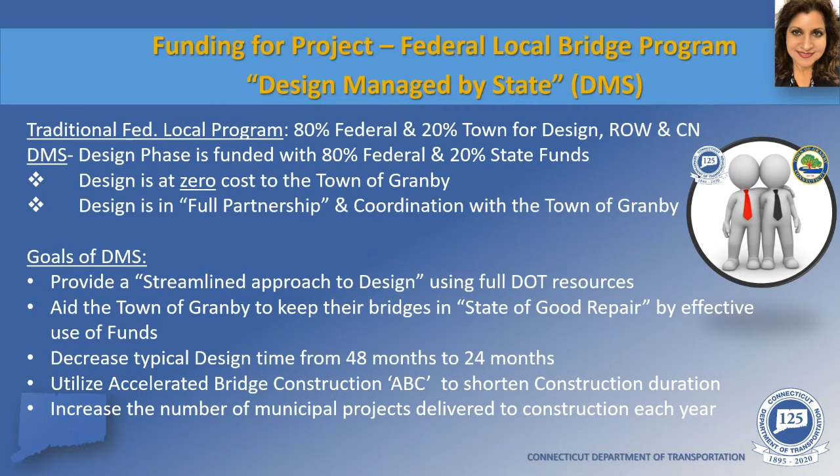Thank you, Preeti. For those of you that do not know me, my name is Kirk Severance, and I am the Public Works Director for the town of Granby. The Connecticut DOT performs safety inspections for all bridges over 20 feet in length at 2-year intervals. The Donahue Road Bridge was flagged as one of those bridges in town needing repairs.

We knew that the bridge needed to be rehabilitated and were looking for the most efficient way to proceed and stay within the guidelines of the allocated bond money. Traditionally, the town would have selected and hired a consultant to develop the design, and they would have been responsible for navigating through the design process, with the town covering 20% of design costs. As Preeti mentioned, when the Department of Transportation offered the DMS program to the town, we felt it was a win-win solution for the town, since the state's pre-selected consultants would have better knowledge of the design process, resulting in both an early completion of design and construction, and not to mention the cost savings.

We started meeting with the state in July of 2019 to get an understanding of how the program worked and how it may benefit the town. After several more meetings with the state, the town recognized that this program would be a good joint effort and agreed to go forward with it.

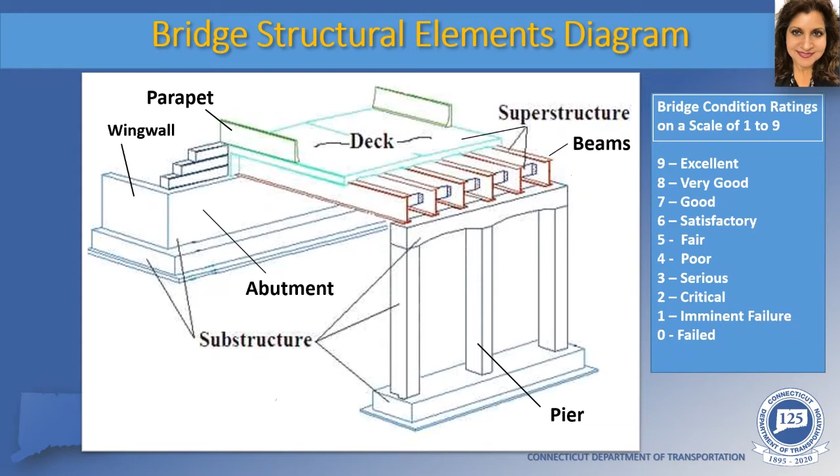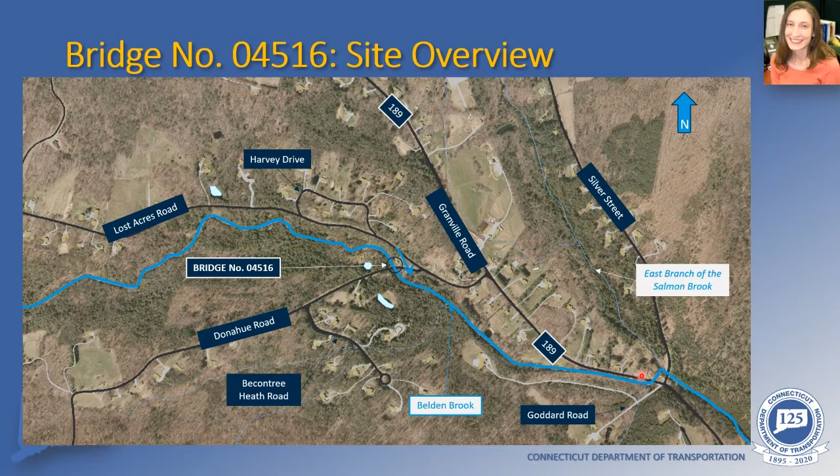The existing bridge was built in 1956 and has a span length of 41 feet 10 inches. The roadway curb-to-curb width is 22 feet 10 inches, and the bridge carries one eastbound travel lane and one westbound travel lane. Per FHWA criteria, the deck geometry is rated a 4, meaning the geometry meets the minimum tolerable limits without needing any corrective action. For the current average daily traffic, or ADT, on Donahue Road of 393 vehicles per day, FHWA requires a curb-to-curb width of 20 feet, which is less than the existing roadway width of 22 feet 10 inches. Even if the daily traffic increases up to 1,000 vehicles per day, the required curb-to-curb width is 22 feet, which is still less than the existing roadway width.

Per Connecticut DOT criteria, at a minimum, the bridge curb-to-curb width needs to match or be greater than the approach roadway width. In this case, the approach roadway width on both sides is 20 feet, so the existing bridge curb-to-curb width, being greater than 20 feet, also meets Connecticut DOT criteria.

A couple of other things to note on this slide. There are overhead wires that run along the north side of Donahue Road to the west of the bridge and cross the roadway and bridge diagonally, connecting to a utility pole at the southeast corner of the bridge. Also, there are a driveway and private septic tank for a residential property located very close at the northeast corner of the bridge.

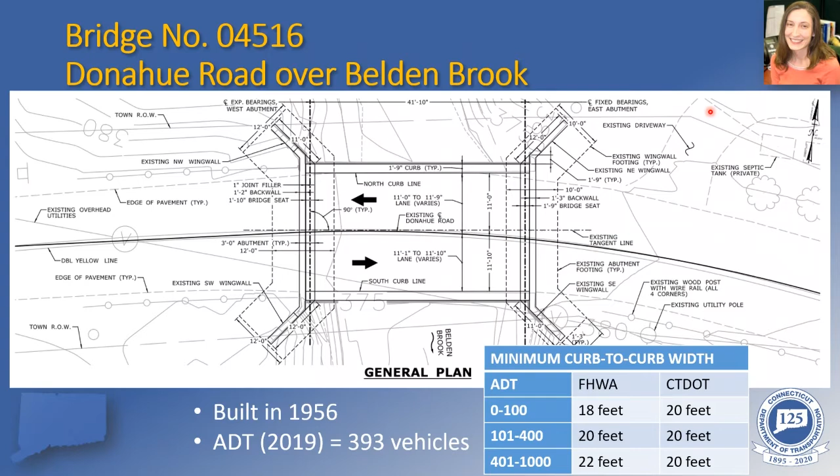The existing superstructure consists of 7 pre-stressed concrete deck units and 2 pre-stressed concrete curb units that are a minimum of 25 inches deep and topped with a bituminous concrete wearing surface. Along both fascias are curb-mounted bridge rail systems that consist of 2 wire cables attached to steel posts. Due to a horizontal curve over the bridge and the bridge being on a tangent, the lane widths vary from a minimum of 11 feet to 11 foot 10 inches.

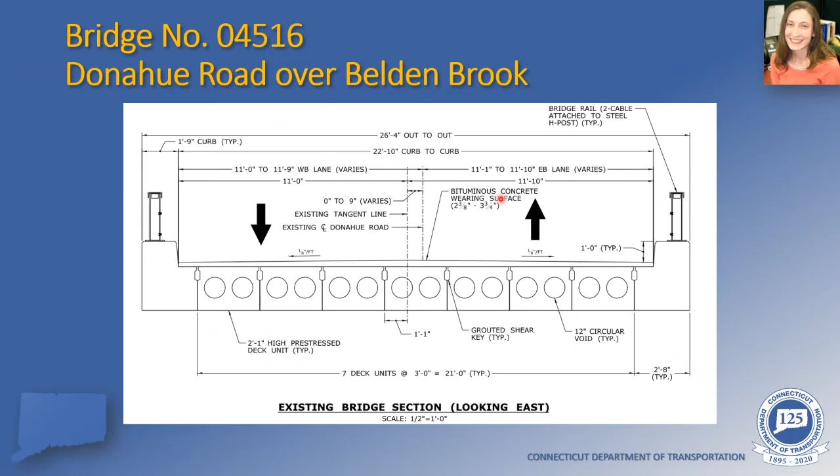The superstructure, shown here, is supported on reinforced concrete abutments that are on spread footings founded on rock. The low chord elevation, located at the east abutment of 378.9 feet, is higher than the 100-year storm elevation and the 500-year storm elevation, meaning that the bridge can pass both the 100-year and 500-year storms. The bridge slopes down from west to east. The approach guide rail consists of 2 wire cables attached to wood posts.

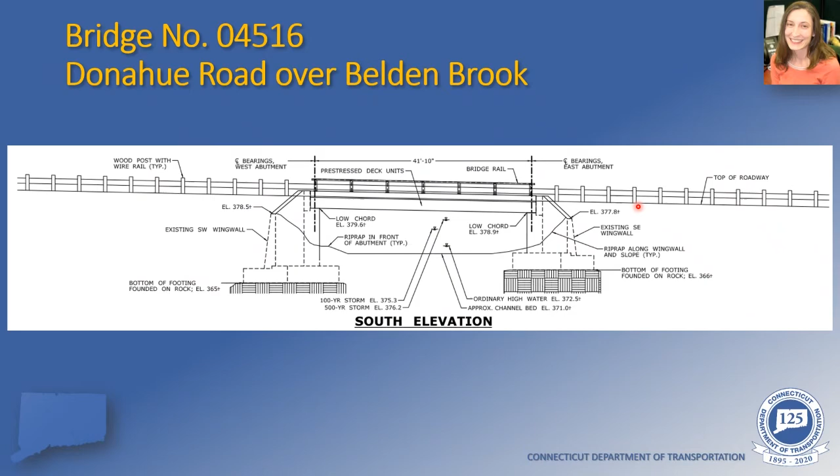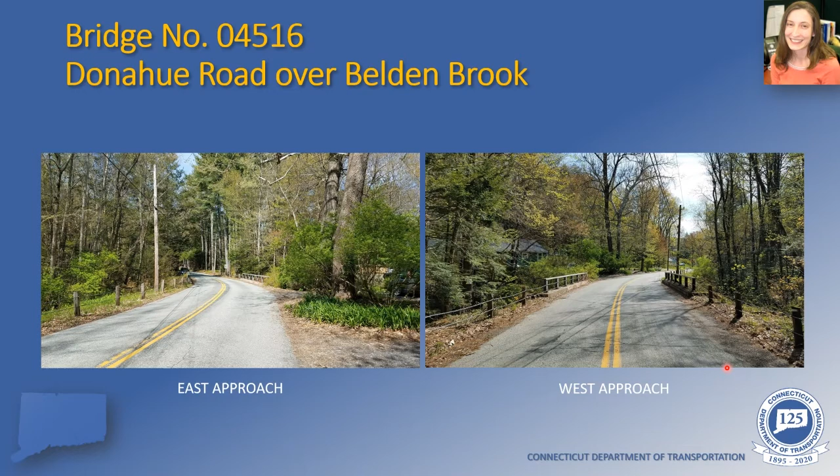In the photo on the left, you can see the horseshoe driveway to the property at the northeast corner of the bridge. As mentioned earlier, bridges are inspected every 2 years and rated on a scale of 1 to 9.

Based on the latest biennial inspection performed in 2019, the deck overall is rated a 5, meaning it is in fair condition. The overlay is considered to be in good condition, with minimal deficiencies noted.

For this structure type, the deck condition is based mostly on the visible portion of the underside of the bridge, and considering there is efflorescence and water staining evident between deck units, the deck is considered to be in fair condition.

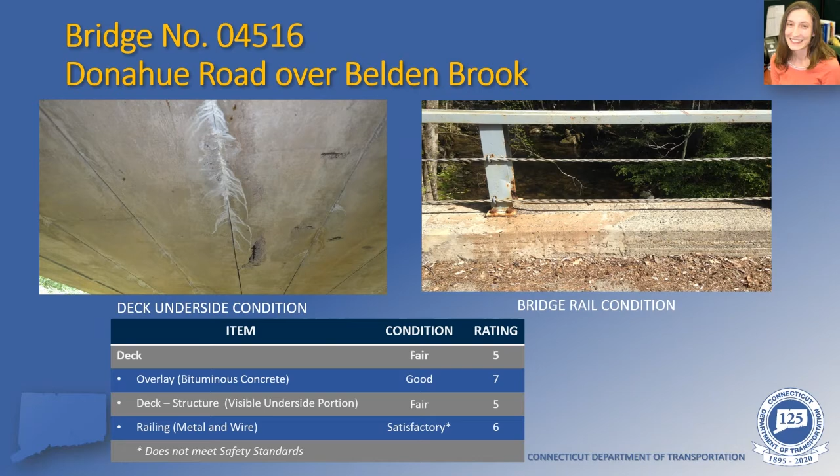The superstructure rating is based primarily on the condition of the girders, or in this case, the pre-stressed concrete deck units, and also the condition of the bearings, which for this bridge consist of pre-molded elastomeric material.

The deck units are considered to be in poor condition due to large spalls in the concrete with exposed, rusted, and broken pre-stressing strands and transverse reinforcement, called stirrups, being found on a few deck units.

The photo on the left shows the worst deterioration, consisting of a few broken pre-stressing strands, which are the ones in the longitudinal direction, and 2 broken stirrups. This was found on beam number 5.

Efflorescence, which is the white stuff here, and water staining between deck units are also typical conditions. There is also a 1-inch vertical misalignment between beams 1 and 2.

The bearings are not shown here. I will point them out on the next slide, but they are considered to be in fair condition due to the pre-molded material squeezing out onto the abutment stems.

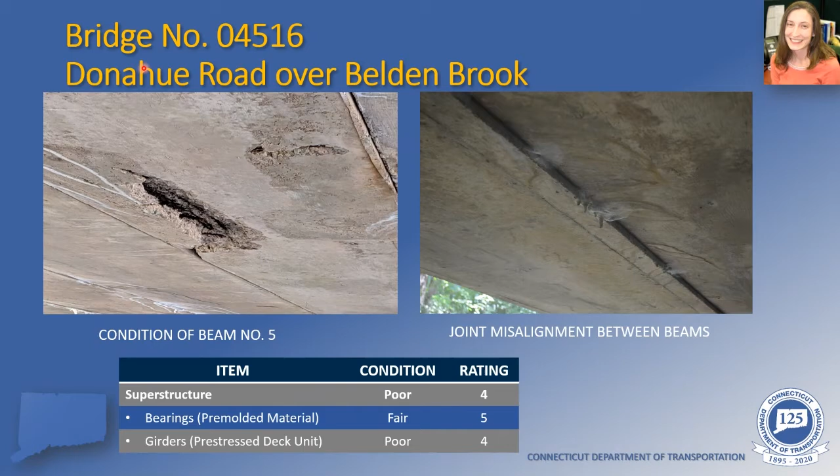These two photos show the substructure units, or the west and east abutments.

Going back to the bearing condition, the bearings were considered to be rated a 5 because, as you can see, they're starting to squeeze out underneath the deck units onto the abutment stem base.

The abutments are in satisfactory condition. There is some minor deterioration noted. There are areas where the concrete has spalled and there are exposed, rusted reinforcing bars.

The footings are generally covered and there's riprap placed along the abutments. However, at the south corner of the east abutment, the footing is exposed slightly.

Based on what's exposed and visible, the condition is considered to be satisfactory. Because this bridge is founded on rock, erosion and scour is not rated. It's not a concern at this location.

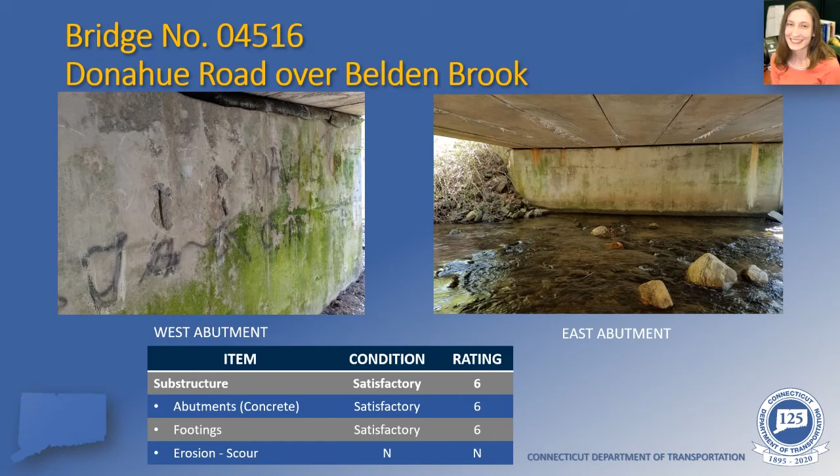These two photos show the channel. On the left, we have the upstream channel from the bridge, and on the right, the downstream channel from the bridge. You can see there's a lot of rock lining the embankments on both sides.

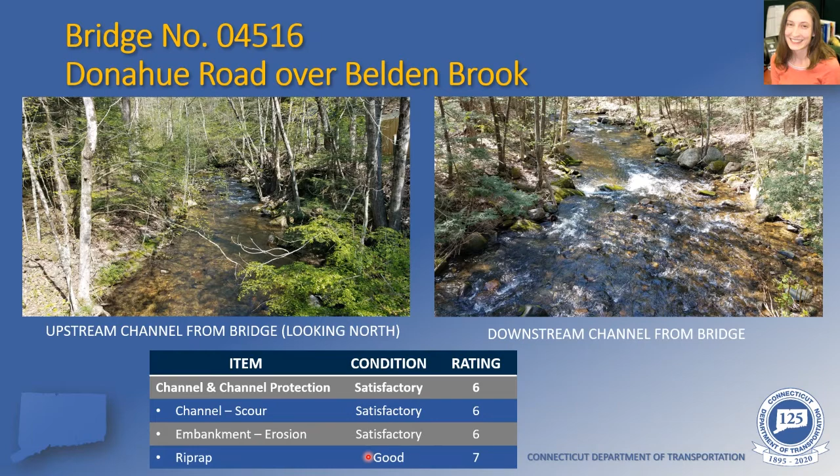The channel scour is considered to be satisfactory. Embankment erosion is satisfactory, generally just noted at the northeast corner of the bridge. The riprap placed in front of the abutments is considered to be in good condition.

Considering all of the existing bridge deficiencies and characteristics, the bridge elements that need to be fixed are the superstructure, which is in poor condition due to exposed, rusted, and broken pre-stressing strands in a few deck units.

Also, the bridge and approach rail systems, which do not meet current safety standards. The substructure is in satisfactory condition and can be reused. However, there are some spalls and other concrete deterioration that could use repairs to extend the service life of the abutments.

On the other hand, the existing bridge is hydraulically adequate and has adequate deck geometry. In addition, the abutments are founded on rock and there are no scour concerns at this location. So no major modifications to the bridge span, width, or profile are required.

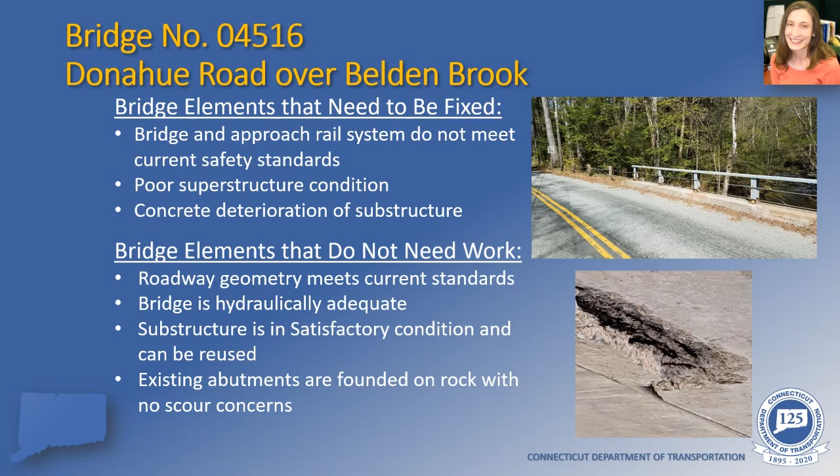The proposed improvements under this project include the replacement of the superstructure with a new superstructure consisting of pre-stressed concrete deck units, similar to what's shown in the photo here and what's on the existing bridge. The new superstructure will maintain the existing 22-foot, 10-inch roadway width. New open bridge rail and approach rail systems that meet current safety standards will be installed.

Concrete repairs will be performed on the substructures along with the application of a protective sealant to improve the substructure condition and increase the service life. Full depth roadway reconstruction in both approaches is also proposed.

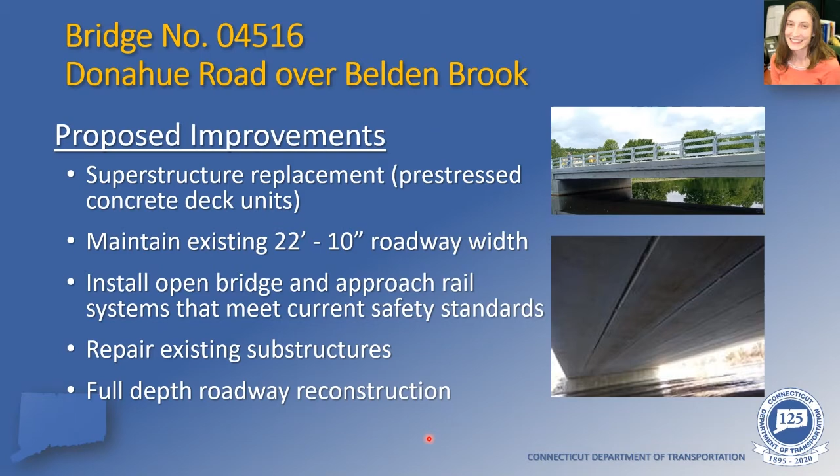On this slide, we're comparing the existing bridge section with the proposed bridge section. The existing bridge has an out-to-out width of 26 feet 4 inches, and the proposed bridge has the same out-to-out width. The curb-to-curb width of 22 feet 10 inches will also be maintained. Since we're matching the existing width, no major modifications to the substructure are needed—we don't need to widen any elements to accommodate the superstructure.

In the proposed design, there are 7 pre-stressed concrete deck units topped with a reinforced concrete deck that has a minimum thickness of 6 inches. The concrete deck will be topped with a waterproofing membrane and 3 inches of bituminous concrete. On both sides, we're proposing open bridge rail that's curb mounted and will meet current safety standards.

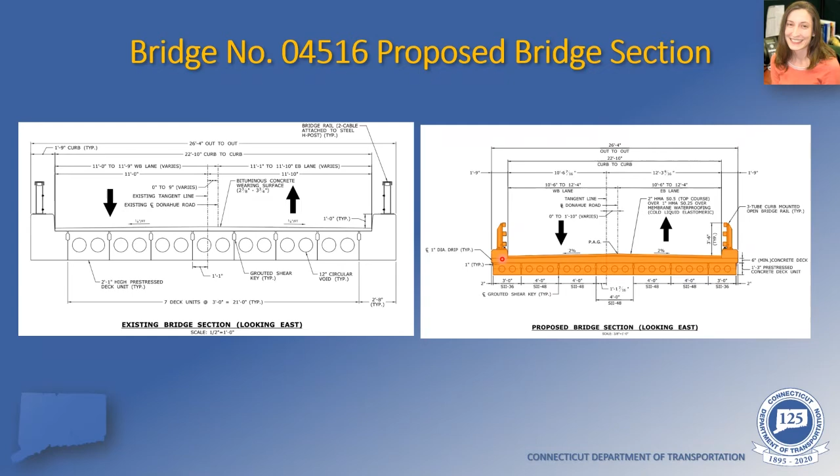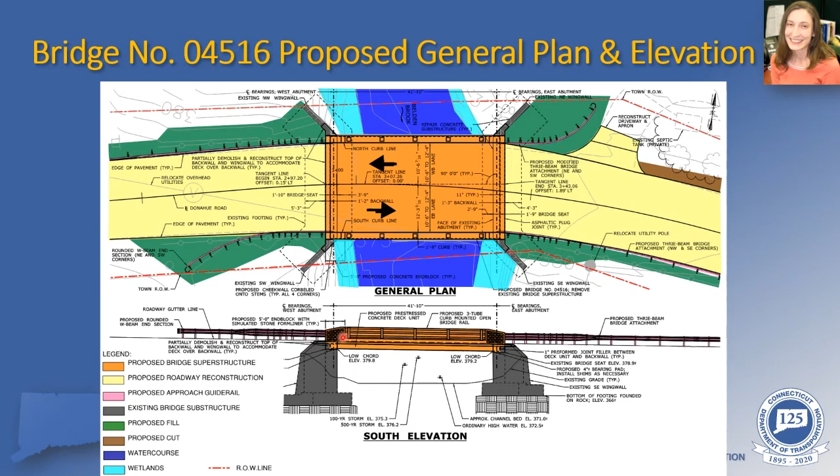I previously mentioned that there is a privately owned septic tank for this property at the northeast corner. It is located here. As you can see with the coloring, construction is proposed to avoid that location.

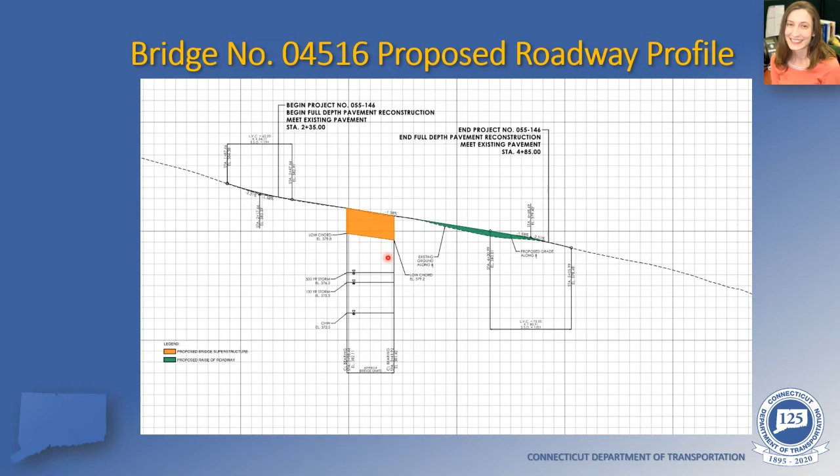There is a dip in the road just east of the bridge, and we're proposing a slight raising of the roadway there to create a smoother curve through this section. Again, the low chord is a little bit higher than the existing low chord, and this is still well above the 100-year storm and 500-year storm elevations, so the bridge is still hydraulically adequate.

During construction, the proposed maintenance and protection of traffic consists of a full closure of Donahue Road at the bridge. It's estimated that this would be for one construction season, or approximately 6 to 7 months. During this time, traffic would be detoured.

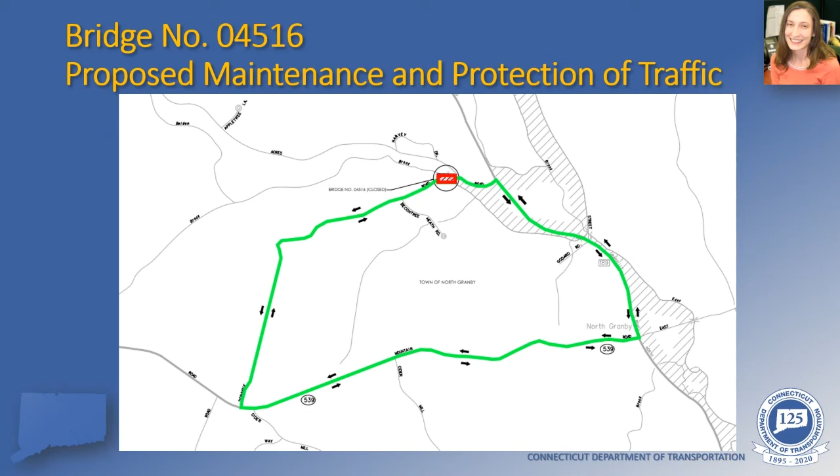As I mentioned before, the utility impacts consist of relocation of the overhead wires that cross over the bridge, and also most likely the utility pole at the southeast corner of the bridge. This will be needed in order to facilitate the demolition of the existing superstructure and placement of the new pre-stressed deck units.

As for environmental impacts, fish passage will be maintained much like it is currently in the existing bridge. Temporary wetland and watercourse impacts are anticipated. However, the good thing about the proposed rehabilitation scope is that most of the work can be performed from the roadway in the approaches to the bridge, so that will significantly minimize the impacts to the wetland and watercourse.

We do anticipate that a few permits will need to be prepared before construction, including the Town of Granby Inland Wetlands permit, the Connecticut DEEP and DOT Flood Management Certification Municipal permit, and also the Army Corps Self-Verification permit.

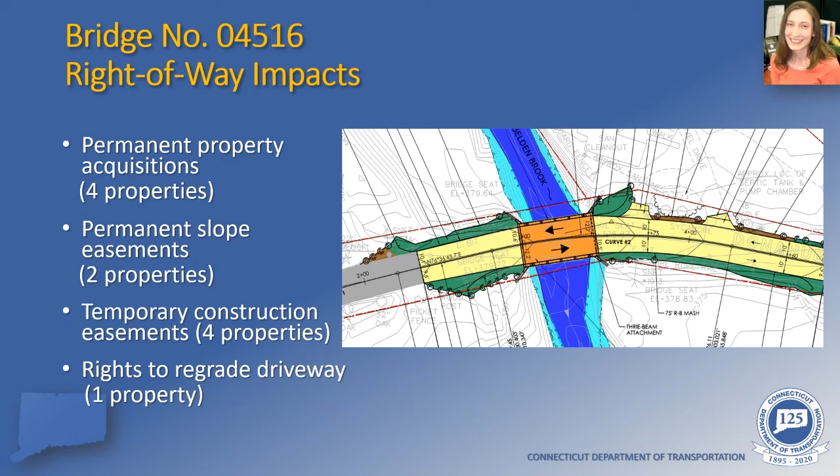As Tracy said, we weighed out all the options, and the route we wanted to go was to replace this as soon as possible. Also, the area is a dark area and would raise more safety concerns, so this was the best avenue to pursue, and that's why we're going forward with this.

Thank you, we have another question. What color will the bridge rail be?

It's up to the town. We'll be working with town representatives to figure out what color they would like. More than likely we'll be going with black railing and cobblestone, similar to the Silver Street Bridge, and the black railing you see over Beeman Road. So that's really the direction we're looking right now.

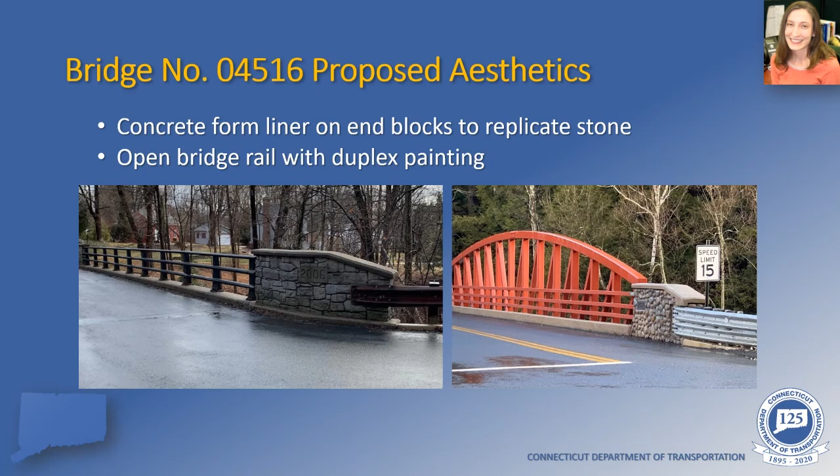Okay, thank you Kirk, next question. Will mail delivery be impacted? How will EMS be coordinated?

We'll talk to the Postal Service, and unfortunately they're going to have to go up the mountain and come down Donahue to service residents on Beacon Tree and Donahue. We're also coordinating our efforts with all EMS - fire department, police, and ambulance - and they're kept in the loop all along. As we get closer to the replacement day, we'll be having meetings and assuring residents that they'll be safe, everything will work out just fine.

Thank you, next question. How will the residents know when the actual detour will begin? Will the town reach out to the residents?

One of the venues we'll be using is our Granby webpage, so I urge anybody in the area to watch that for updates. We'll also be using signage in the area, there'll be times when we send out flyers to residents, and we'll be borrowing the police department's electronic signboard. So we'll do all we can to inform everyone and make this as smooth as possible.

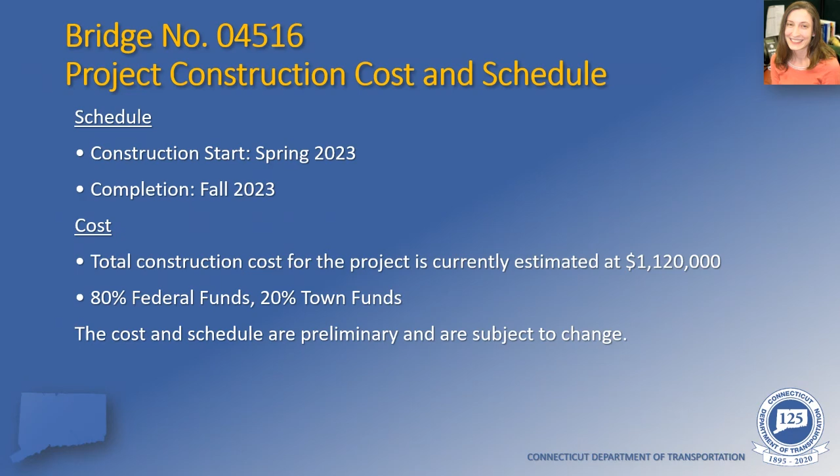We have another question. There's an assumption that access will be maintained for residences at the northeast corner of the bridge, being within the construction limits. In the project documents and specifications, we will note that the contractor has to maintain access for that property owner so that they can get in and out of their driveway.

And just to add to Tracy's response, there'll also be a full-time inspector monitoring the bridge construction. If there is any requirement for the contractor to temporarily block a roadway or driveway, they will seek permission from the owner before doing that. That coordination will happen during construction, and that will be the responsibility of the inspector on the job.

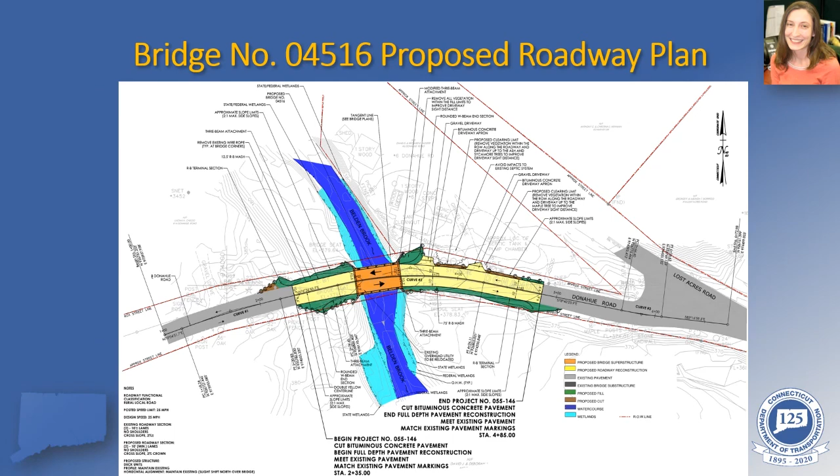Thank you, Anand. We have another question: Will Donahue be closed for the duration of the project, or only while the superstructure is being replaced? At this point, it's primarily for the demolition of the bridge and the superstructure work, as well as the approach roadway work.

So there are some other activities that can be done outside of the roadway closure, like installing the MBR, etc. When we get further into design, we can look at shortening that duration time frame, but conservatively, we're estimating 6 to 7 months.

Next question: Will there be construction activities during the weekend? This is Tracy from CHA. At this point, as we answered earlier, we don't anticipate needing to do any construction on the weekends.